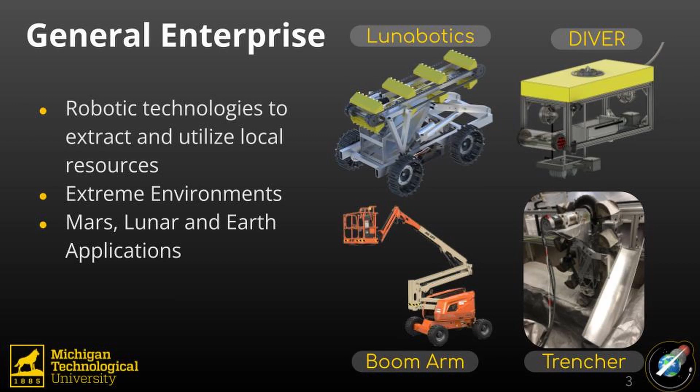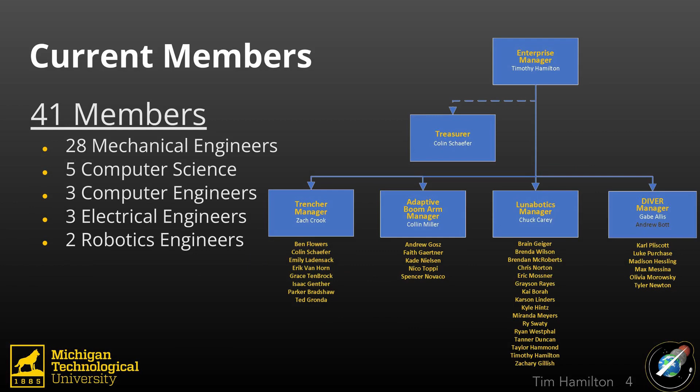MINE works in multidisciplinary groups to develop technology to perform tasks in extreme environments on Earth and on other planets. The Enterprise is currently working on four different projects: Lunabotics, Diver, Adaptive Boom Arm, and Trencher. This year we will be focusing on the Trencher project but giving a brief overview of the other projects. The Enterprise currently has 41 members from various majors and specialties. Each of these teams have put in a lot of work this semester, and I'm excited to showcase all of their hard work.

Hi, I'm Gabe Allis, co-leader of the Deep Investigation Vehicle for Energy Resources team, also known as Diver. Diver stands for Deep Investigation Vehicle for Energy Resources, as I mentioned earlier. It focuses on making an untethered ROV to explore and map flooded mines, with the specific goal of exploring Quincy Mine. Our goal is to collect data for those interested in the possible implementation of a renewable energy resource within Quincy Mine, specifically geothermal or hydroelectric power.

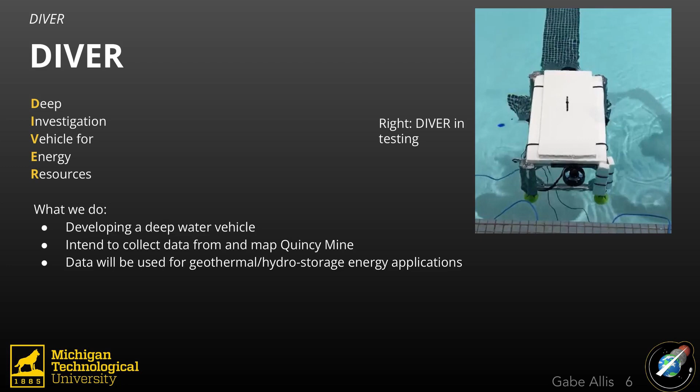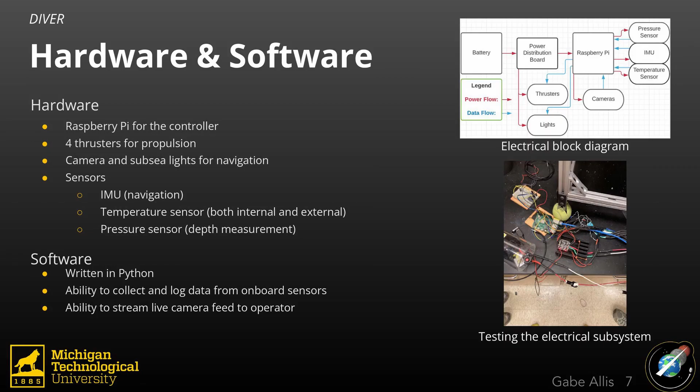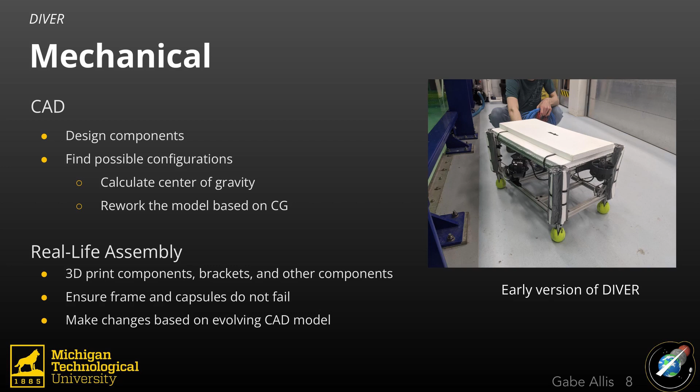To accomplish this, we use a combination of sensors as well as an integrated hardware-software design to collect data such as temperature and pH while simultaneously mapping the mine. The physical design of the ROV and the placement of its center of gravity is critical to its submerged operation. This project is one of the first of its kind, tackling the relatively new challenge of repurposing mine shafts. The uniqueness of this project allows members to be especially creative in overcoming the challenges presented.

Hi, I'm Chuck Carey, lead of the Lunabotics team, currently MINE's largest project team. Over the last 3 years, the Lunabotics team has been participating in NASA's annual robotic mining competition. Competing with teams from 50 different universities across the nation, this project focuses on designing, manufacturing, and testing a lunar rover. This rover needs to be capable of excavating and transporting simulated lunar ice, a valuable resource which can be used to create rocket propellant and support human life on the moon.

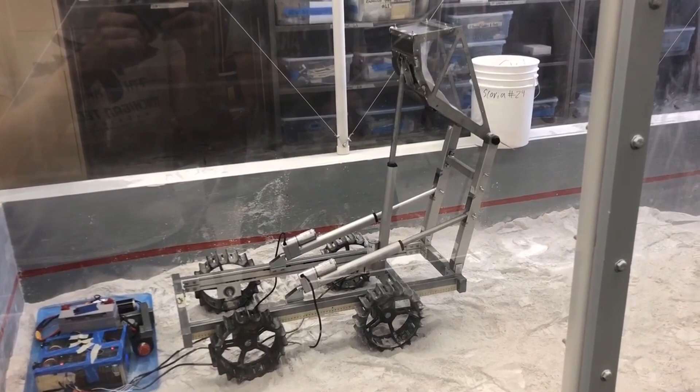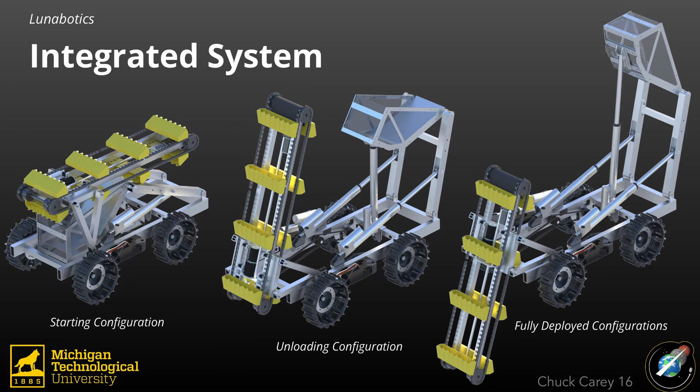The robot will interact with lunar regolith, a fine substance that presents additional challenges to system mobility, mechanical wear, electrical heat dissipation, and more. To meet the expectations of the competition, the Lunabotics team has elected to use a systems engineering approach, breaking the project down into several subsystems. These include the chassis, hopper, excavation, electrical hardware, software and communication, and system integration teams. The Lunabotics project gives students valuable experience with complex engineering in the rapidly expanding space industry.

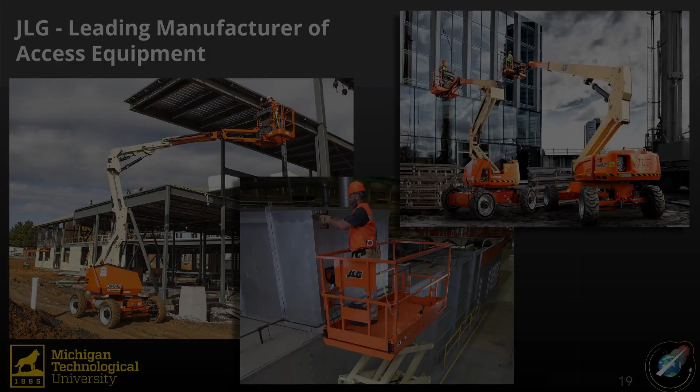Hello, I'm Colin Miller, the team lead of MINE's Adaptive Boom Arm project. For the past 2 semesters, we've been working on a specific design challenge provided by our industry sponsor, JLG, who are a leading manufacturer of access equipment. JLG recruited our team to design and prototype an adaptable boom arm that is able to maneuver around obstacles. Due to this project being under a non-disclosure agreement, we are unable to go into specific details of our solution. However, we can present an abbreviated synopsis of our work.

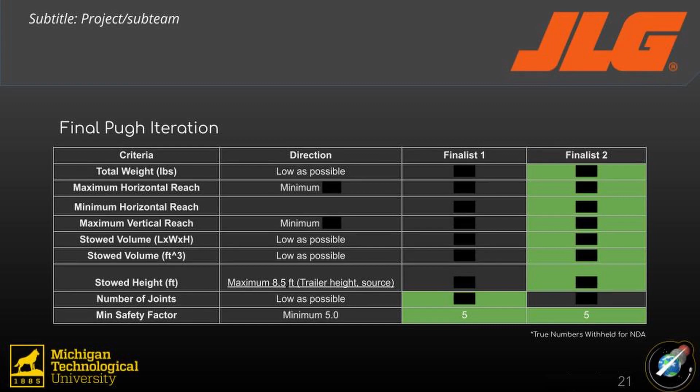To begin, our group brainstormed multiple novel solutions to the specified project, and then used the Pugh analysis strategy to narrow down the options until we arrived upon the most optimized design. After that, we began to simultaneously work on a full-size CAD model and a scaled-down physical prototype, so that we could most accurately demonstrate our design's efficacy to JLG.

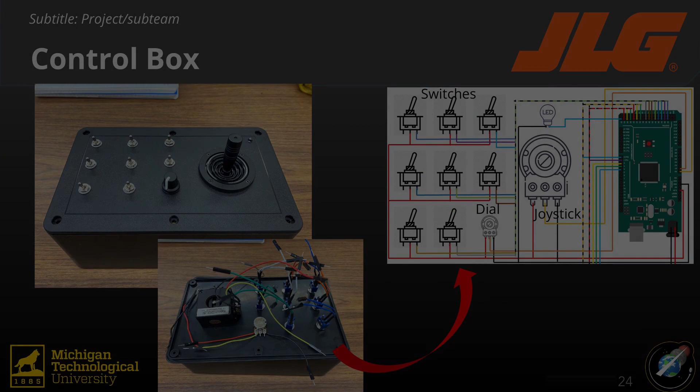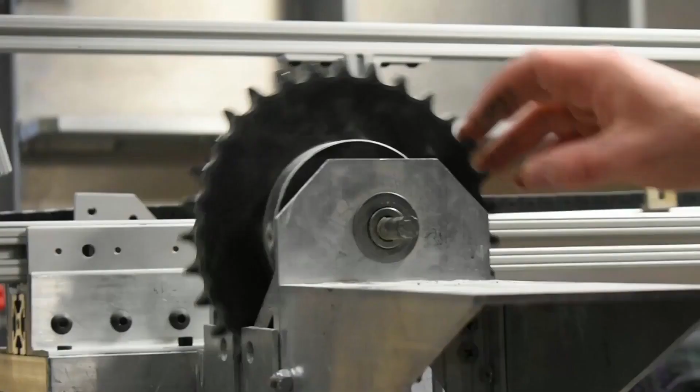With the Artemis program, NASA aims to send astronauts back to the moon by 2025 and establish a permanent human presence. Building the necessary infrastructure to complete this task will require an abundance of resources. Because of the high cost of launching supplies from Earth, efficient and inexpensive processes need to be developed to take advantage of the materials available on the moon. With these challenging goals steadily approaching, NASA has been working with contractors and universities to make this mission a reality.

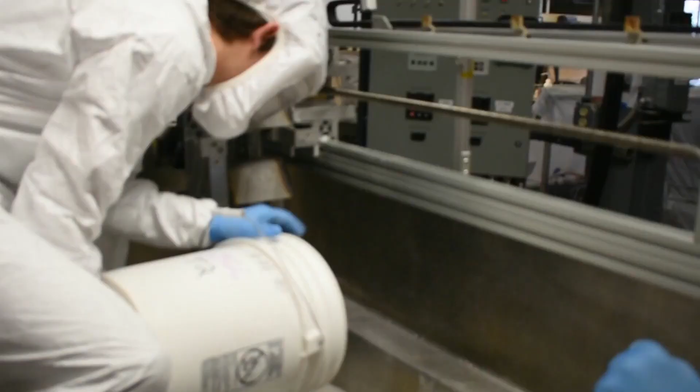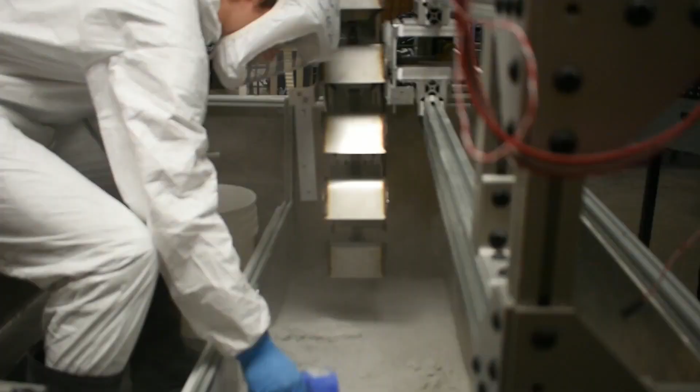The Lunar Trencher is an enterprise project within the Multiplanetary Innovations Enterprise at Michigan Tech that aims to provide a proof of concept of extracting the lunar surface with a bucket ladder style excavator. Bucket ladders offer a continuous method of excavation that can transport a large amount of material with minimal electricity, an important consideration for operations on the moon. With bucket ladders, NASA will be able to extract icy regolith to create rocket fuel on the moon and have a reliable method to shape the lunar surface.

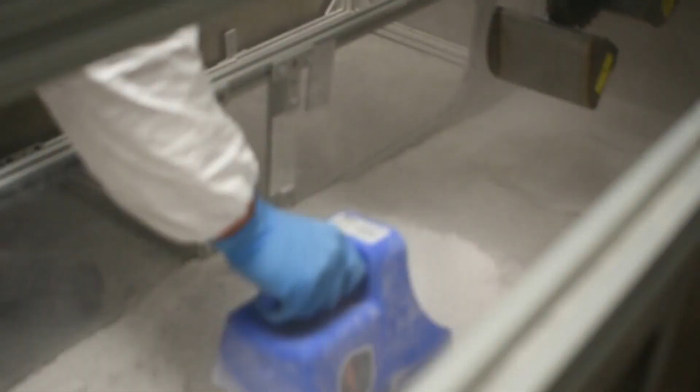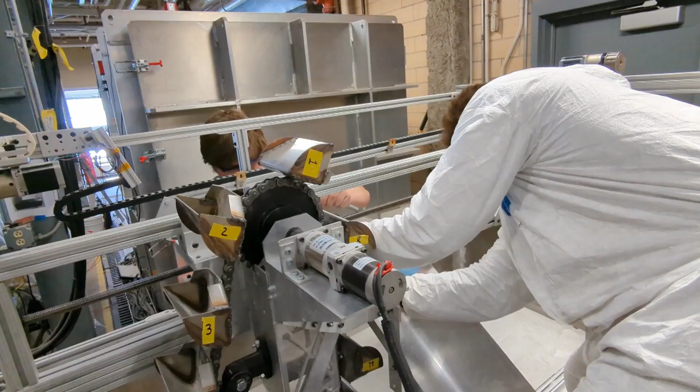The Lunar Trencher team is currently testing a custom-built bucket ladder to obtain usability, power, and wear data in simulated lunar regolith. The team also has plans to test the bucket ladder in vacuum conditions to gather important data for future designs that may be used on the moon. To accomplish these mission goals, the Trencher team, currently composed of 9 undergraduate students, has modified the Trencher for vacuum testing and aims to achieve a rating of 6 on NASA's Technology Readiness Level, or TRL 6. This means the system must be tested in a simulated lunar environment.

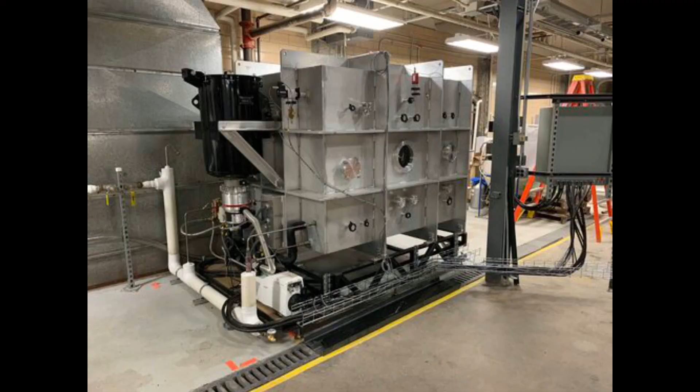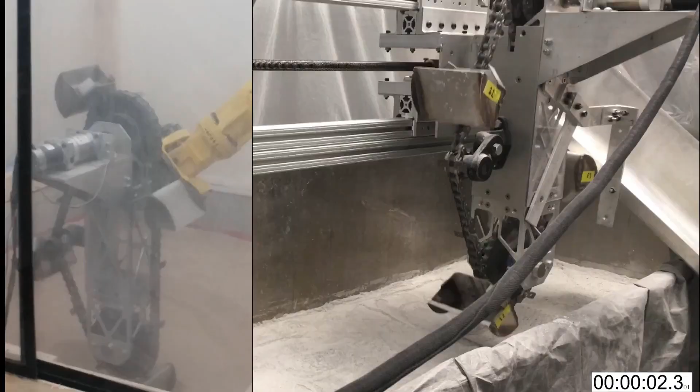Before the team could perform the required tests for TRL 6, we first had to prove that the Trencher was operable at atmospheric conditions. This was done using a sandbox and regolith cart from Michigan Tech's Planetary Surface Technology Development Lab, or PSTDL. The team also had to make additional modifications to the Trencher, such as creating a gantry system, adding a chute, and modifying the Trencher electrical systems.

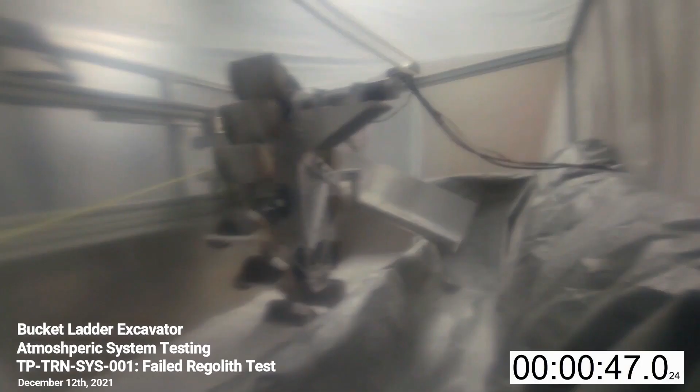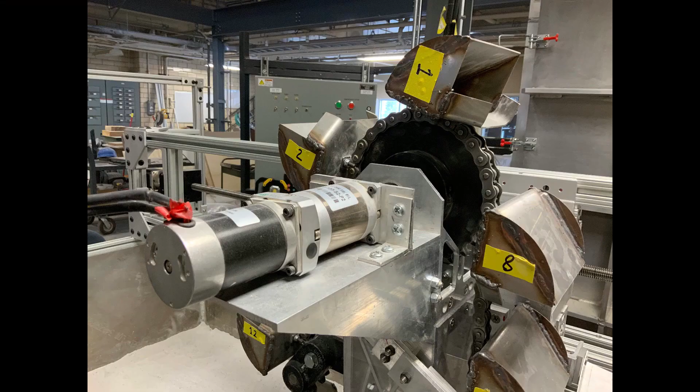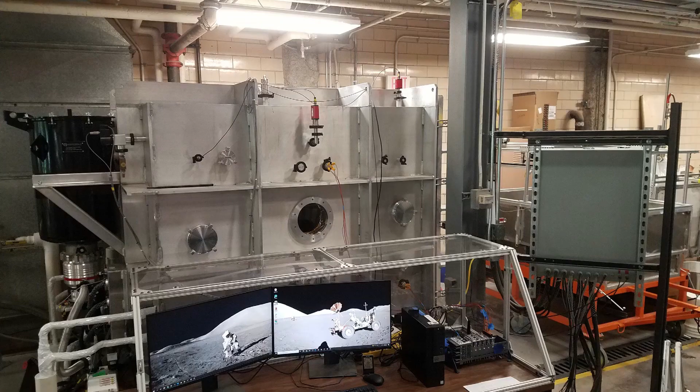The Trencher is composed of 5 subsystems: communications, drivetrain, frame, testing equipment, and buckets. The frame is the mechanical body of the Trencher, which includes the mounts for drivetrain components and the regolith chute. The drivetrain consists of the components that drive the buckets. The mechanisms used to move the mechanical assembly of the Trencher are referred to as the testing equipment. This includes the FANUC robotic arm as well as the Dusty Thermal Vacuum Chamber, or DTVAC, which is housed in the Benedict Lab within Michigan Tech's Minerals and Materials building. The Trencher was tested using our custom-built gantry system.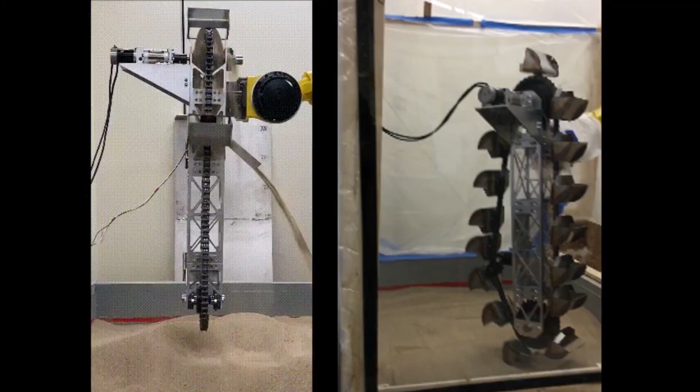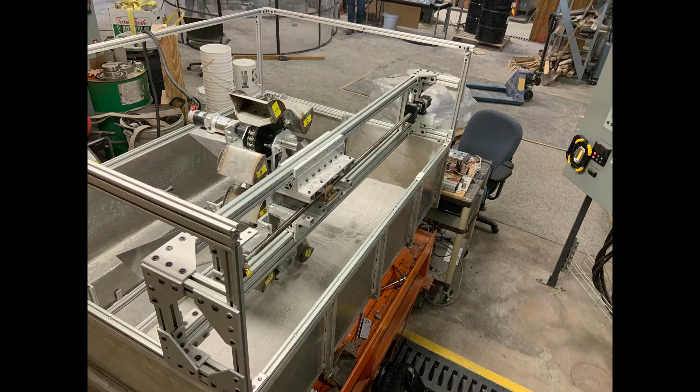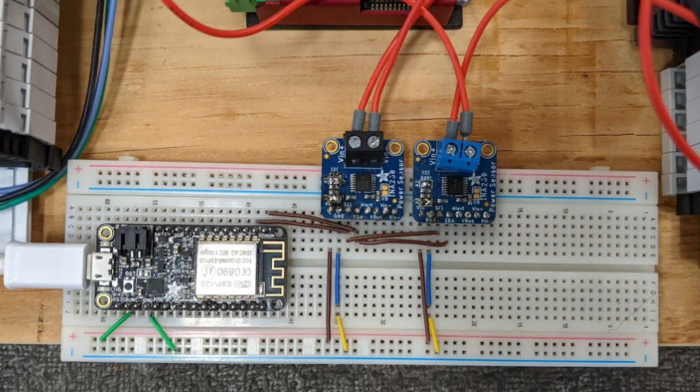Finally, the communications subsystem controls the drivetrain and the gantry system and also handles the acquisition of power data for the Trencher. Testing and data collection began in earnest during the 2021-2022 school year. The team first tested their ability to use the Trencher in a sandbox environment. Once the Trencher was moved to the DTVAC regolith cart, power consumption was then recorded. The project aims to record electrical consumption to determine if it is an effective and efficient excavation tool for a lunar environment. To do this, we have isolated the current draw on the Trencher motor from the drivetrain and testing equipment to determine the pure electrical usage.

Vacuum testing to simulate lunar conditions will be done using MTU's DTVAC, which can achieve 1 microtorr. The team is also testing wear and tear on the bucket ladder system at atmosphere and vacuum to evaluate the long-term reliability of the system.

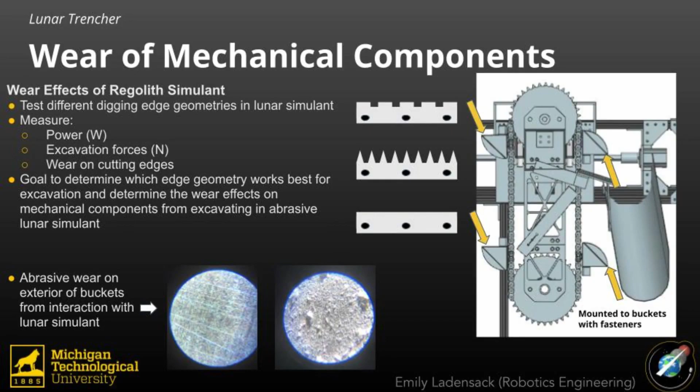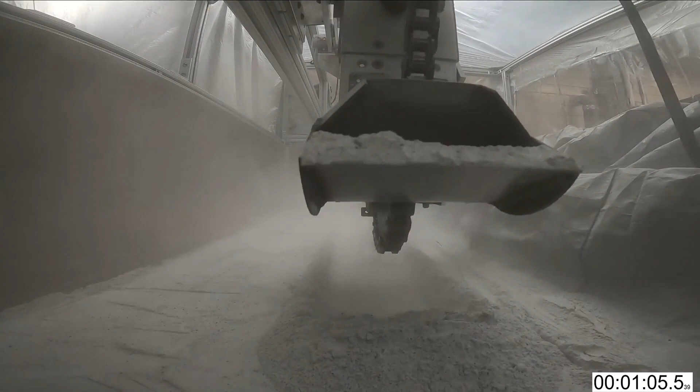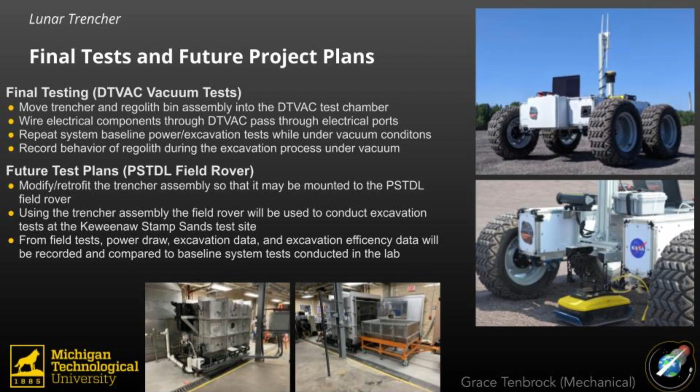As the semester comes to an end, the team hopes to perform an additional DTVAC test to obtain more useful data. Next fall, the Trencher team will return to Michigan Tech and implement a vertical motion stage to the gantry system. This will give the Trencher the ability to make multiple passes during a single test, making each test more efficient and informative. Once DTVAC testing is completed, the team will transition to attaching the Trencher to the PSTDL's field rover. This will be used to more closely simulate real-life use of the Trencher through testing at the Keweenaw stamp sands.